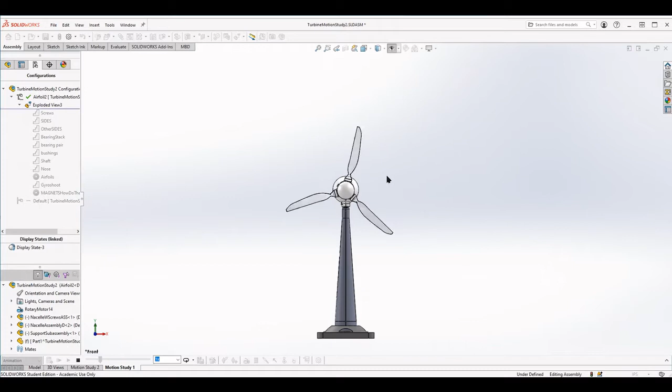This is our group project. It's a small desktop windmill. It's plastic, 12.9 inches high, with a 4-inch base. We have a nacelle, a nose, airfoils, tower, and base. And there's also a nice little bearing stack here, so it can just twist in the wind.

This miniature turbine is cute and functional. It was inspired by the Netherland dwarf rabbit, which, as you know, is the cutest of all possible bunnies on this planet.

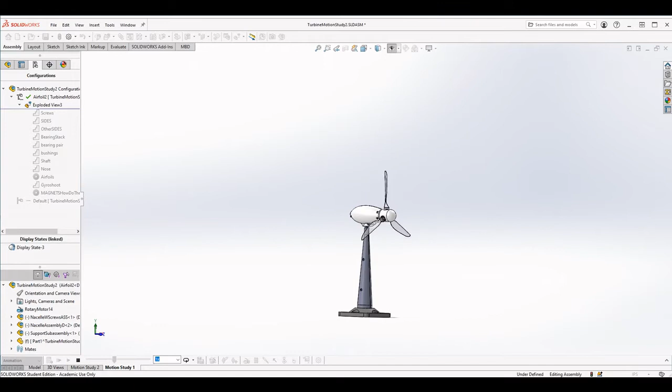We can see an abstract shape of a bunny here. Little bunny tail, and the airfoils look just like little bunny ears. And just like a real bunny, its head spins round and around and around. Look at that. Let's make it explode.

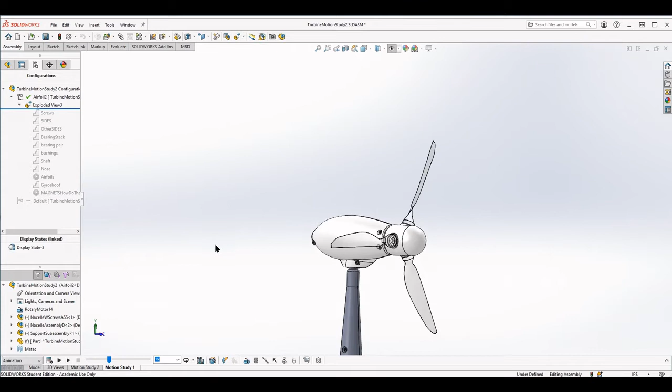First we take out the screws. I like to use socket head cap screws. Socket head cap screws are rugged and you can torque them hard. But you can use any kind of screw you like - countersunk, wafer, shoulder, but not button head.

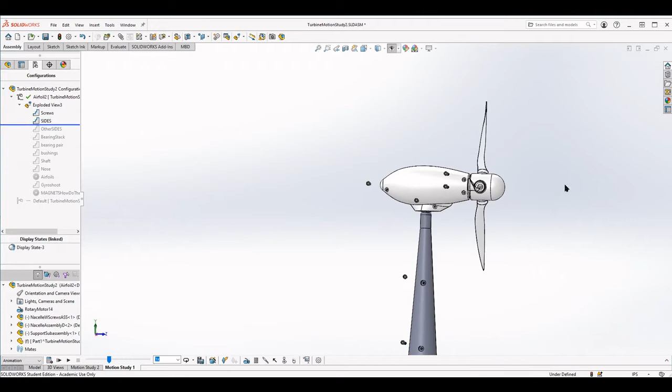Let's take off the sides, and the other sides. You can see there aren't too many harsh angles. They can be molded or 3D printed easily. They're currently titanium white, but a nice brushed aluminum will give them a space age vibe.

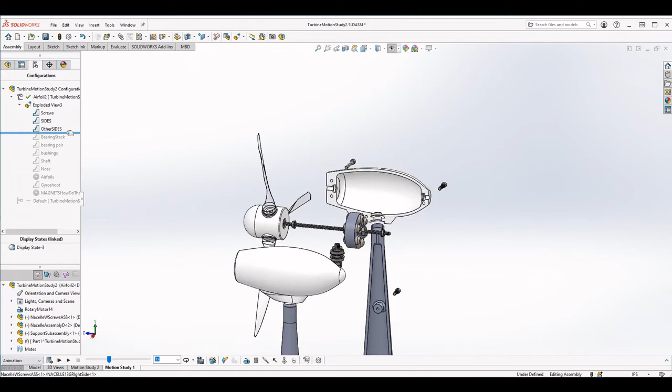Let's section it. Here you can see a big shaft, just a simple threaded rod. We hold the part steady by doubling over the nuts, but a nice purple Loctite 222 will hold it for as long as you please.

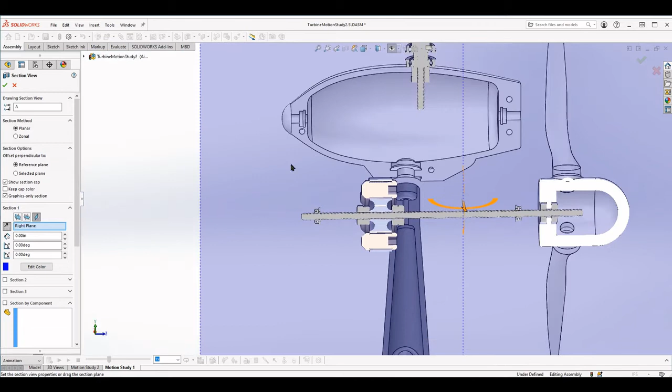Some tiny flange bearings here. They're easy to install. Just pop them into the grooves and they know how to handle the rest. You don't need any glue for this.

You have a tiny little pair of nuts here holding the nose to the shaft. And if we wanted, we could embed them in place with SLA printing. A little time, a little patience, comes out nice.

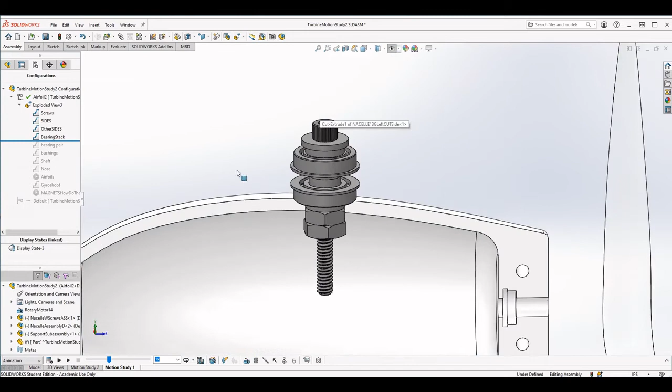We have some horizontal bearings. You know, my grandma always said, kids, bearings need to run in pairs or momentary loading will leave you in a pickle. So that's why there's two of them. That's why they're big.

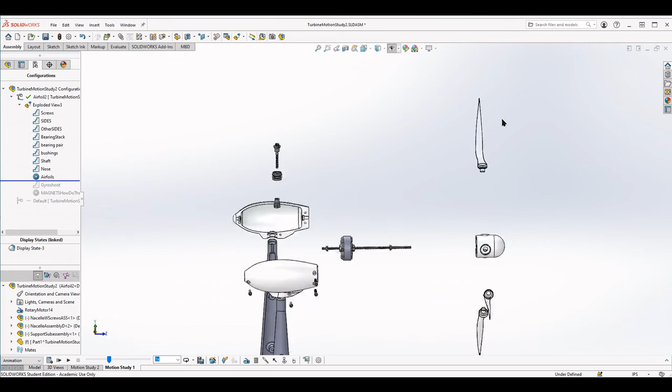This airfoil is acrylic resin molded. The shape is made by taking a NACA airfoil and then lofting it along. We spiral it out along a tangent from the tip. Then we extrude a nice little plug to the hole.

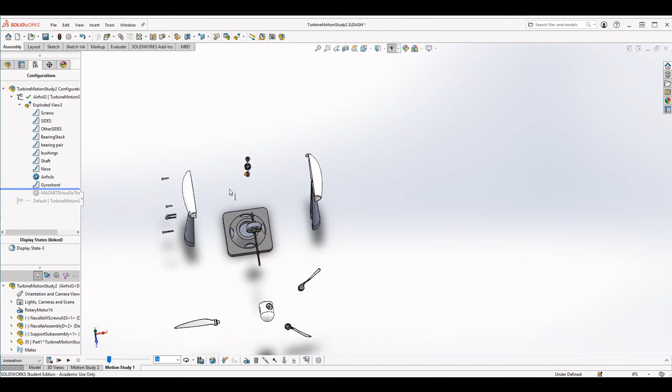We have a little plastic gyroscope. We're using set screws for mass. But you know what? With a little magnetic or optical pickup in the right place, you could measure RPM. You could even replace this with a stepper motor and use it to generate 12 volts of electric love.